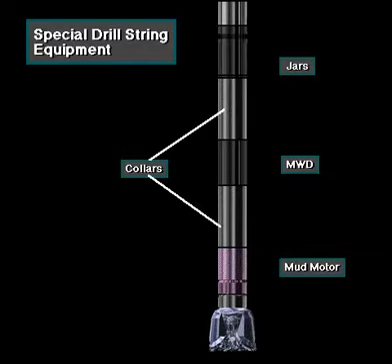The rig crew installs a drilling jar in the drill string if there is a concern of becoming stuck. Drilling jars are usually made up in the upper part of the bottom hole assembly, with drill collars placed above and below the jars. When activated, a drilling jar provides a heavy blow to the stuck portion of the drill string below the jar. Often, the blow delivered by the jar is enough to knock loose the stuck string.

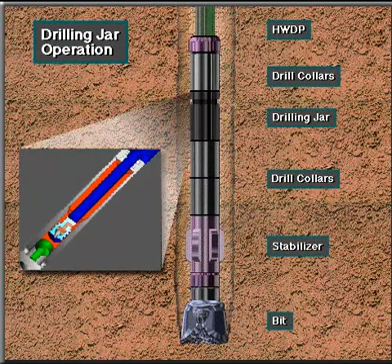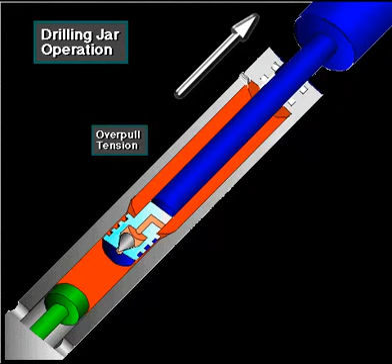To create a jarring blow with a hydraulic jar, the driller lowers the drill string to cock the jar. Then, the driller applies an upward pull. The upward pull puts the jar in tension and allows the jar trip mechanism to slowly bleed. Eventually, the jar trips when the hydraulic oil bleeds past the ports.

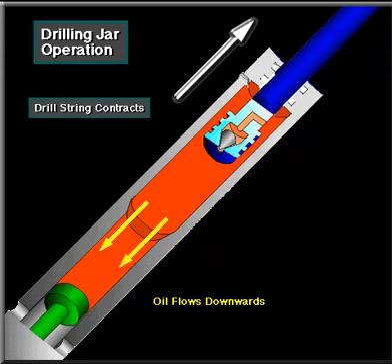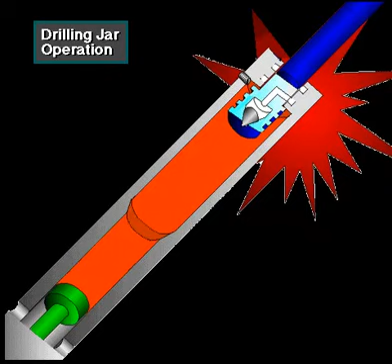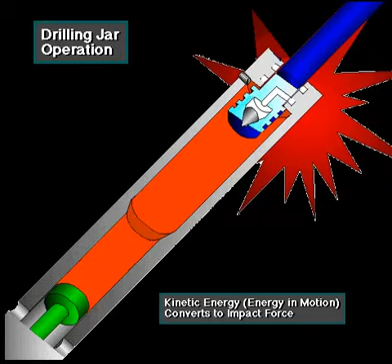The drill string contracts, rapidly accelerating the bottom hole assembly above the jars. When it reaches full stroke, the jar mechanism suddenly stops the motion energy of the string. When the motion suddenly stops, it converts the kinetic energy, or energy in motion, into impact force on the stuck point. This heavy upward blow may free the stuck string below the jar.

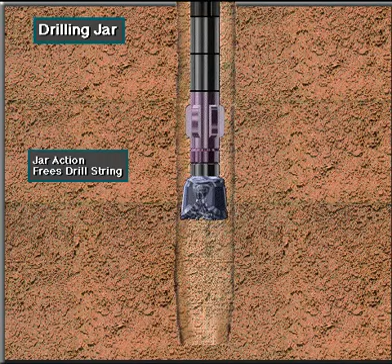Measurement while drilling, MWD tools are a big help to the driller as the bit drills. Crew members usually place the tool in a special drill collar close to the bit. MWD tools sense downhole conditions and transmit them to the surface. There, the driller monitors the conditions in real time.

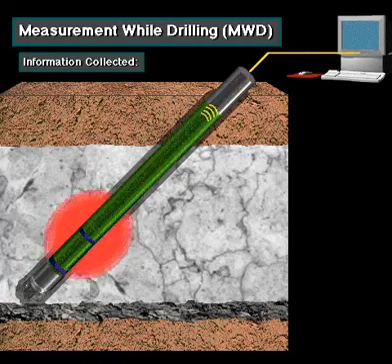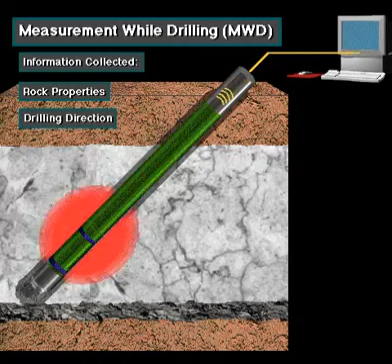Most MWD tools create pulses in the drilling mud. These pulses carry the downhole information up the drill string to the surface. Information collected by an MWD tool includes rock properties, the direction the bit is drilling, torque, and weight on bit.

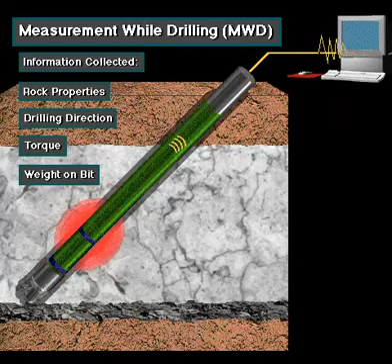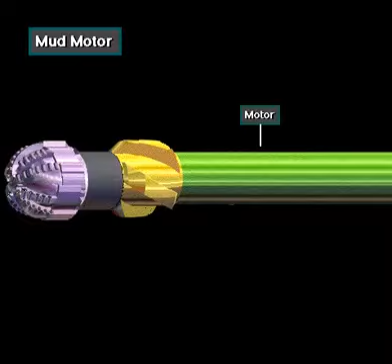Often, when drilling a directional or horizontal well, a mud motor is made up in the bottom of the drill string, just above the bit, as shown here. It's called a mud motor because drilling mud rotates the bit. That is, when using a mud motor, only the bit rotates, not the rest of the drill string.

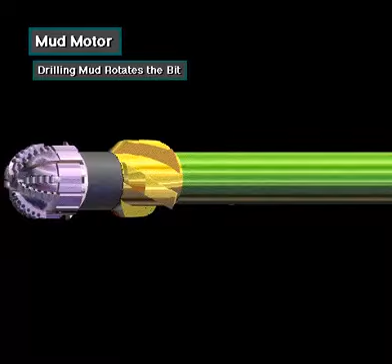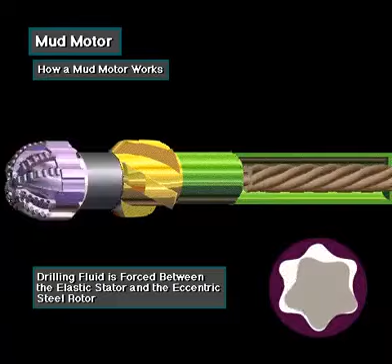Mud pumped down the drill string enters the top of the mud motor. When pressurized drilling fluid is forced between the elastic stator and the eccentric steel rotor, a torque is applied which causes the rotor to rotate. The rotor is connected to a drive shaft, which is connected to the bit. Note that all of the drill string does not rotate.

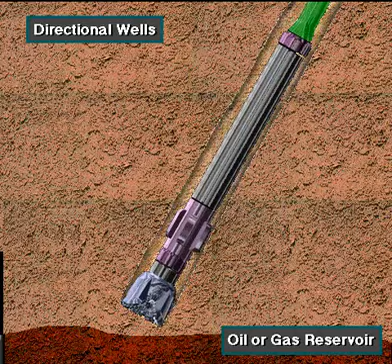Sometimes a well is drilled at an angle. This is called a directional well. The well is steered at an angle specified in the drilling program for many different reasons. For example, they may drill directionally if the oil or gas reservoir does not lie directly under the rig site.

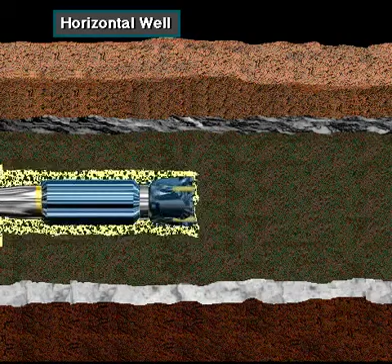This point is termed the kickoff point. The horizontal segment of the well can extend for several thousand feet. Specialized drilling equipment and techniques are required to drill horizontal wells.